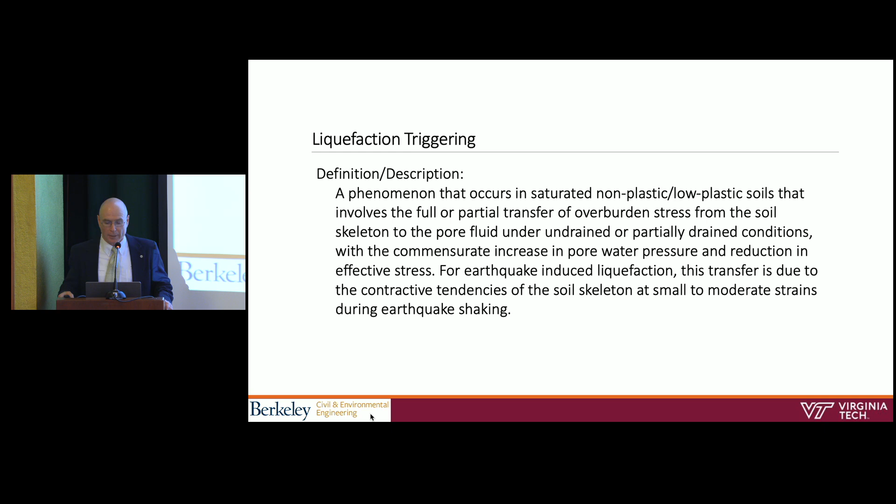The significance of this is really the fact that if you're decreasing effective stress, you're going to decrease strength. And with that, you could potentially have a bearing capacity failure, shown on the left, or you could have potential slope stability failure, or anything else where soil strength is important.

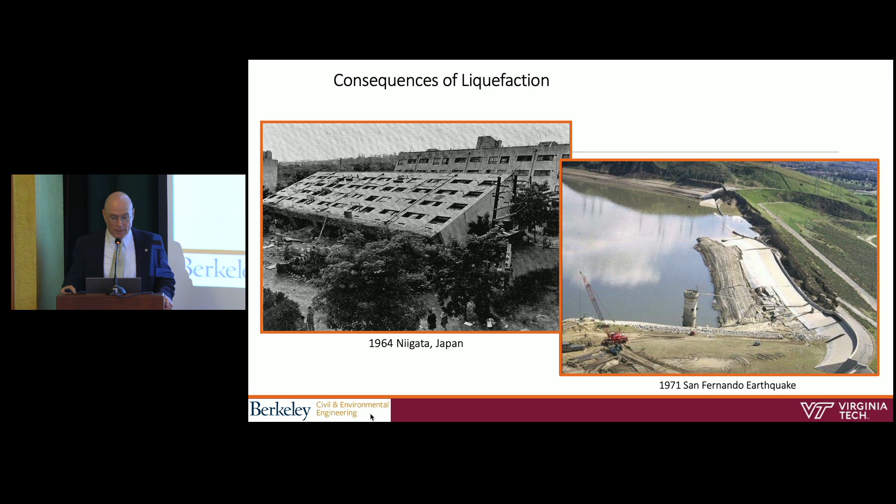Building on what Jorge said about Jim focusing on why - we're interested in knowing why liquefaction occurs, and then how to evaluate it, and then also how to remediate it. And again, this is the focus of the presentation.

Now, this isn't a timeline sequence of understanding liquefaction. I've put this together to help understand the question, why. This figure is from Professor Youd's PhD work, and what you're seeing on the horizontal axis is shear strain, and on the vertical axis volumetric change or change in void ratio.

So this is for an unsaturated or drained condition. These were strain-controlled tests, and what you're seeing is different numbers of cycles of loading - 1 cycle of loading here, 30 cycles of loading here, and 1,000 cycles of loading here. If you look, you'll see there are 3 different symbols, related to different confining stresses, running from 4.8, or essentially 5 kPa, up to about 200 kPa.

So the control parameter here was that the relative density was relatively constant, but it was showing that you're going to get the same volumetric strain when you induce a certain shear strain, independent of confining stress.

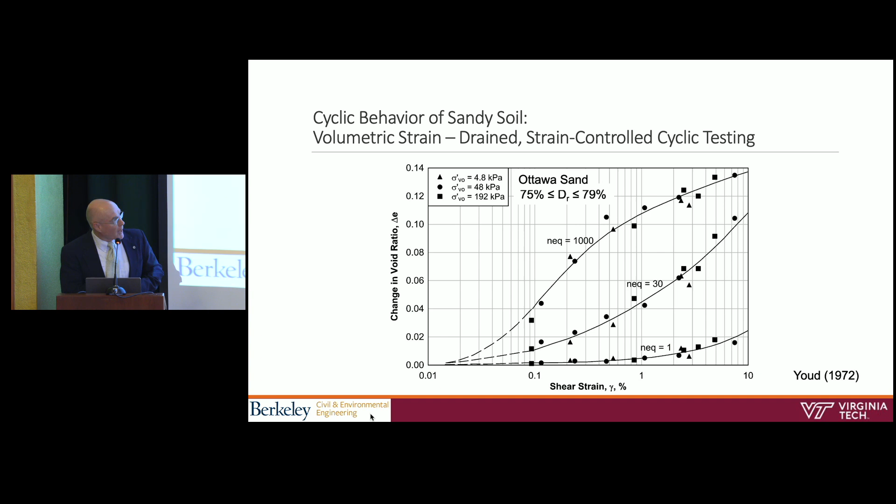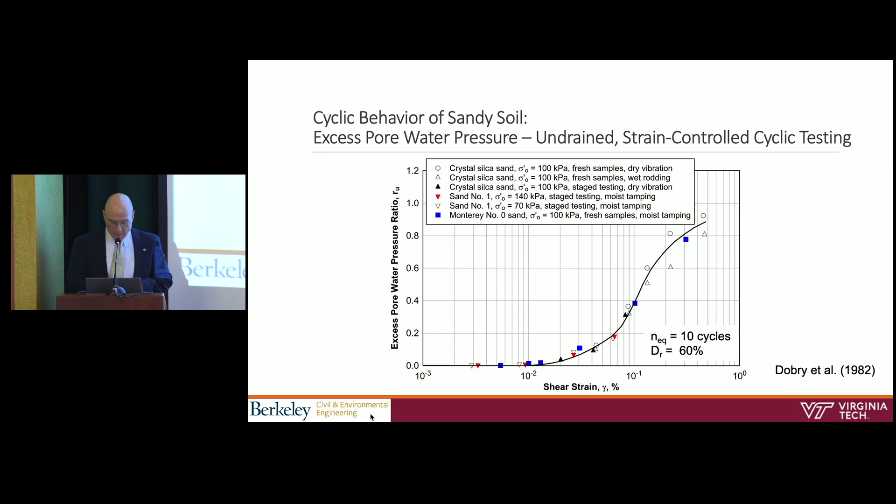If we now transfer this to undrained conditions where you have saturated soil, this is work from Professor Dobry. What you're seeing on this plot is shear strain on the horizontal axis and excess pore water pressure on the vertical axis. All these different types of data points fall into one nice line. These different symbols represent different types of soil and slightly different confining stresses, but when you put it in terms of strain, things normalize together. So it seems like a strain-based procedure would be the way to go. The reason is that for drained cases, we get the same volumetric strain, and for undrained cases, we get the same excess pore water pressure. Everything seems to normalize, both on soil type and confining stress.

However, inherently, the strain-based procedure has to be in an effective stress space. Remember that we're predicting accelerations, which relates to stress. In order to get to strain, we have to go from stress to strain. We need a constitutive model. We need to take into account the softening due to pore pressure generation. As a result, we really can't come up with a simplified strain-based procedure.

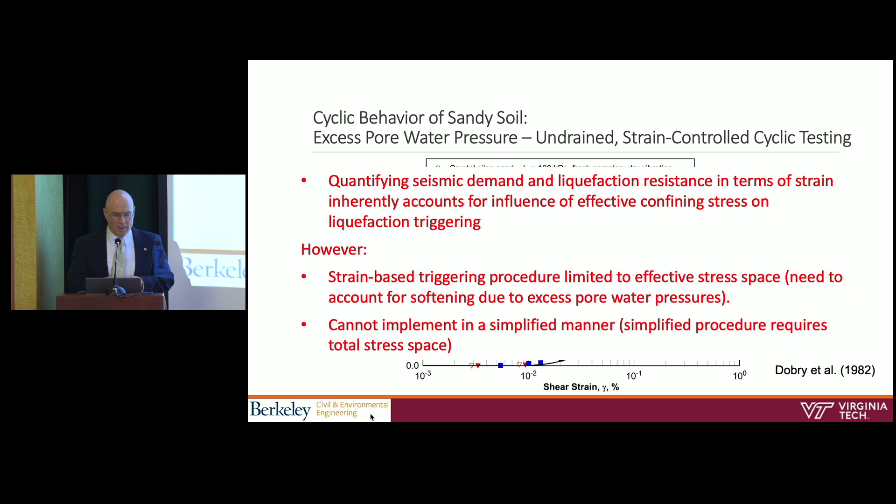So this didn't quite come out the way that I expected. That dot's a little bit bigger than it was supposed to be.

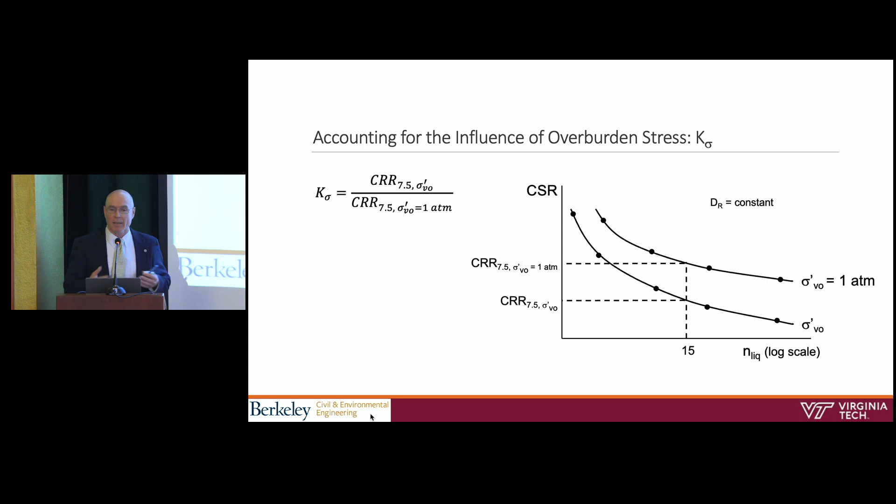This K sigma factor that I showed on the previous slide is simply the ratio of these two stresses corresponding to 15 cycles. That 15 cycles generally is considered the duration for a magnitude 7.5 event, which is our reference earthquake.

Compiling empirical data from a few different papers that I digitized, what we're seeing is K sigma factor on the vertical axis and vertical confining stress or mean confining stress, depending on whether it was cyclic triaxial or cyclic simple shear, on the horizontal axis. Most of these studies were performed in support of the design or evaluation of dams, and you're seeing a wide range of data, so there's considerable uncertainty and scatter. I'm highlighting the Duncan Dam data here, the green star, because I'm going to show those later, and also because that was a very detailed study.

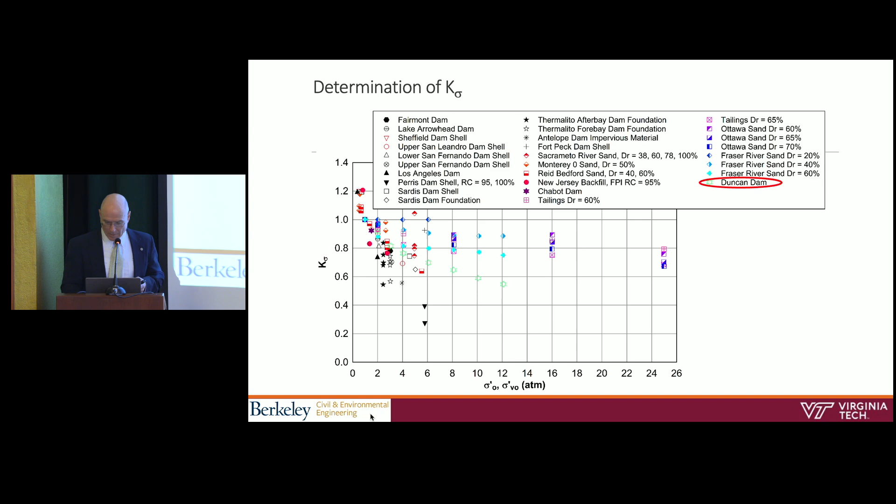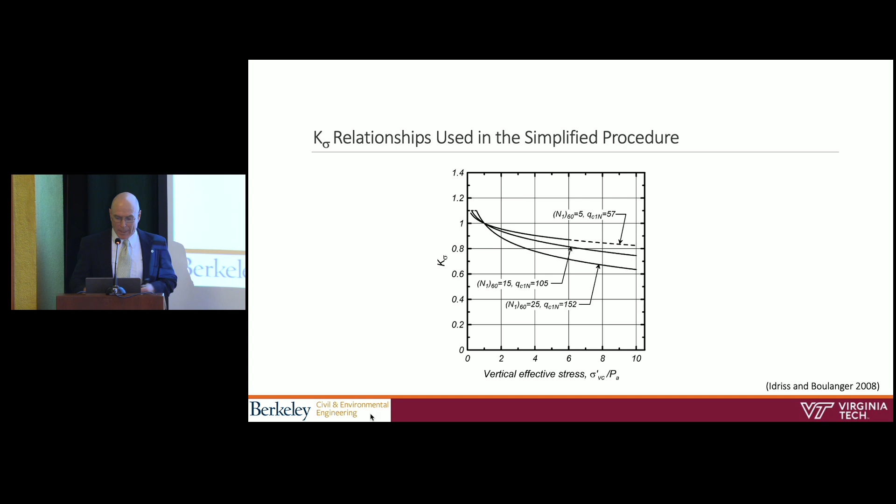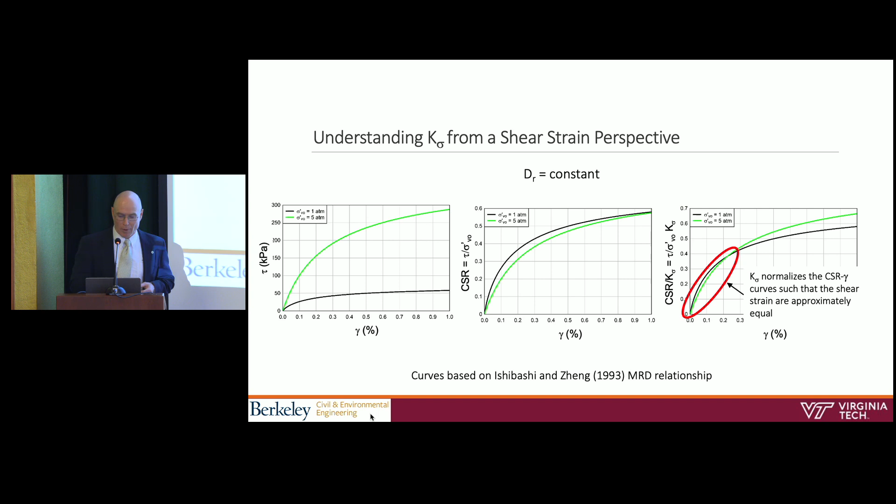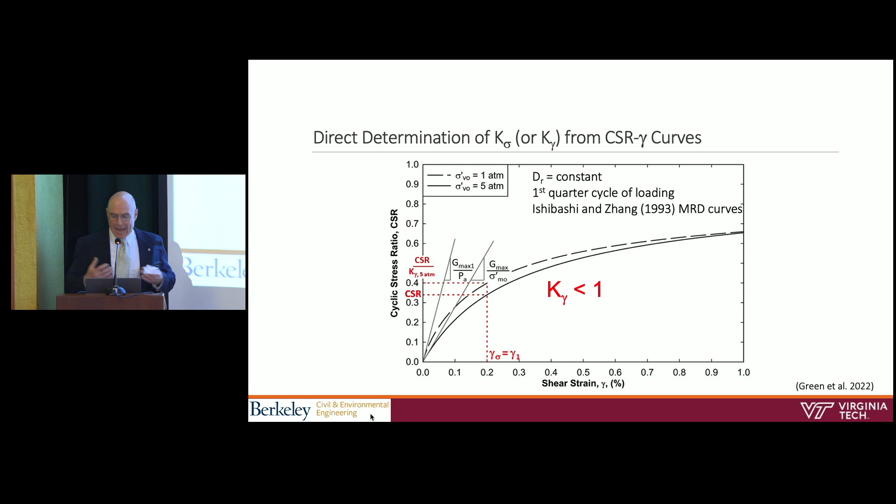So remember from the laboratory case, those curves that they were using were all at the initial liquefaction triggering, which means they only apply really for a factor of safety of 1, as opposed to factor of safety less than 1 or factor of safety greater than 1. And in this case, all of these are for a certain density, but I could plot other curves for different densities using the same approach.

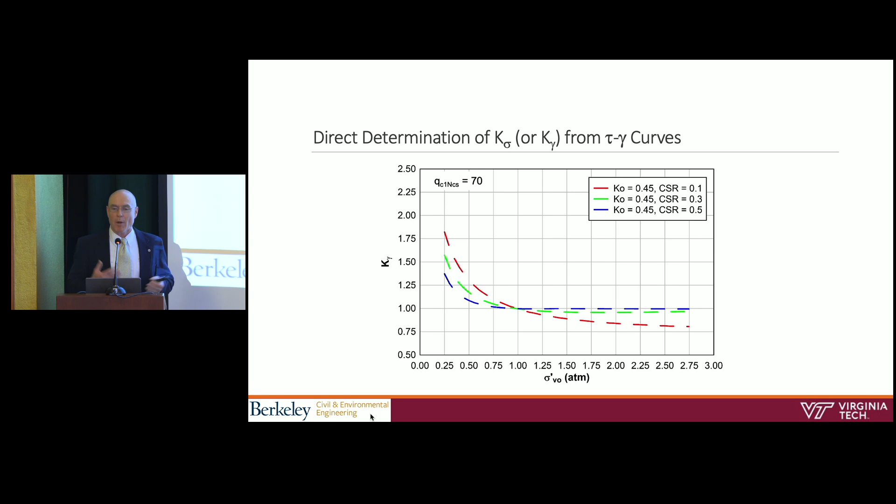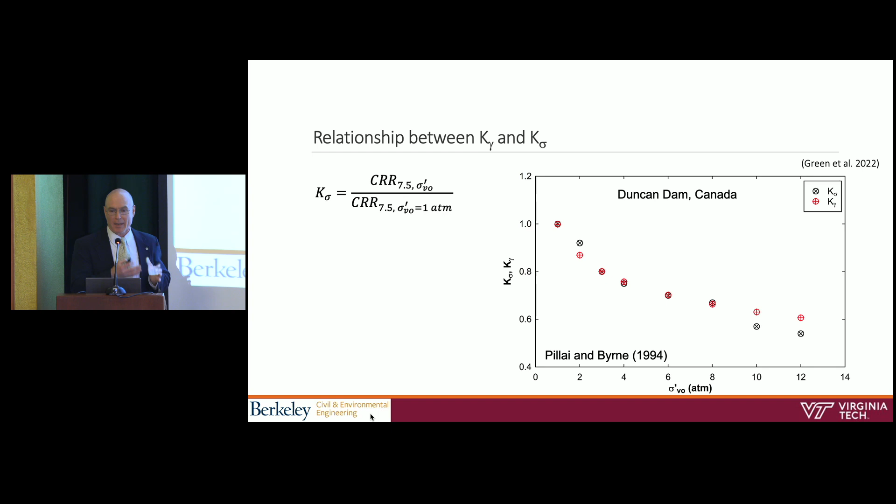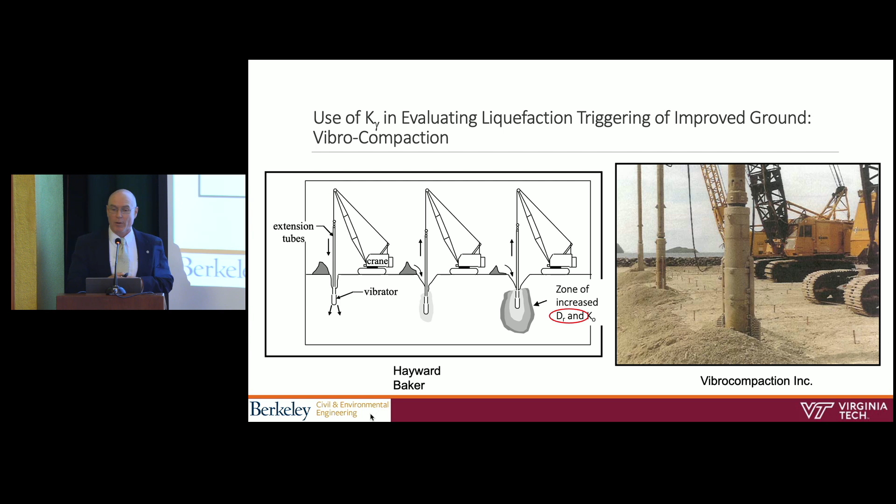So for vibrocompaction, just let me quickly summarize what you do for it. You're inserting a vibrating probe in the ground, typically assisted by water jets. You're getting it down to the depth of improvement that you want. You're letting it vibrate. As the soil densifies, you're now putting in more backfill. And then you repeat this process and you work your way out. So you end up with a column of soil that has increased relative density and also increased K0. And again, the slides got slightly skewed.

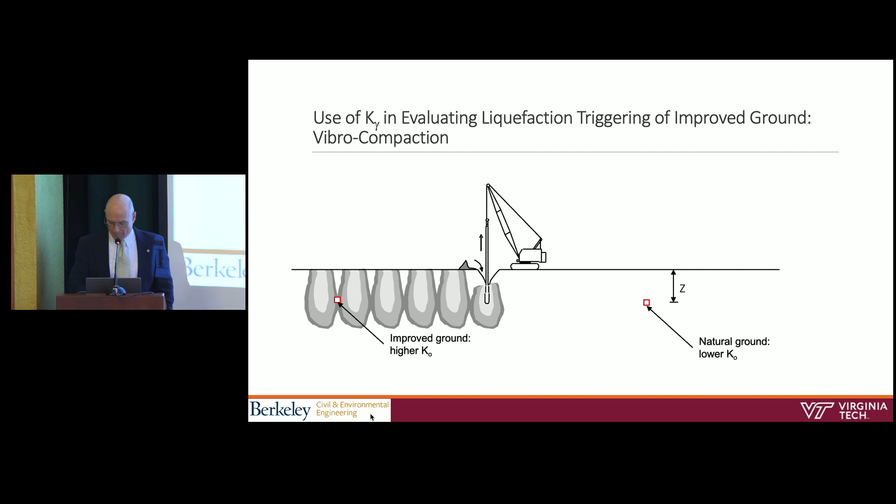And this increase, what I'm focusing on is for improved ground, but it also could be due to increased lateral stress due to aging. So you saw Professor Baxter present previously on the influence of aging, increasing K0. That will also have this same type of influence, maybe not to the extent of ground improvement.

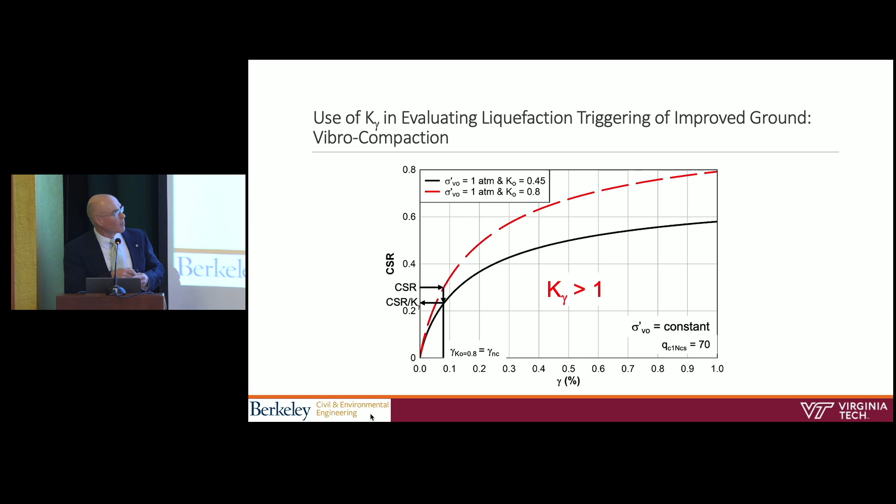And as far as the simplified procedure, we started out here, and as a result of the ground improvement or increase in lateral stress, we're moving down here. Both still are falling on the liquefied side, but the overall goal is to decrease this down into the non-liquefied side. So going back to my K-gamma factors, this is what I previously showed for normally consolidated soils.

Now I can plot it for just the increase in lateral confining stress. And my K-gamma factors now all plot above 1 up here. So what does that mean from a standpoint of liquefaction triggering? Again, it's going to reduce our cyclic stress ratio, which is going to increase our factor of safety.

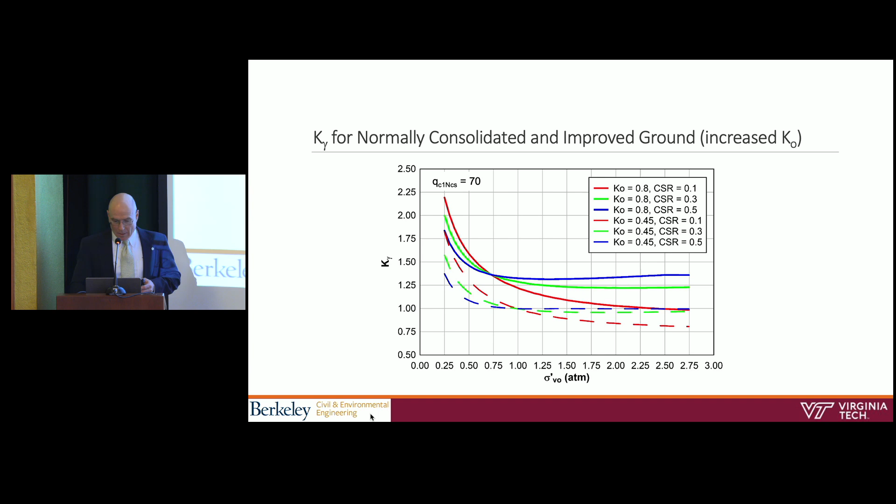However, Rodrigo showed the influence of lateral stress on cone penetration resistance. And this is work that Rodrigo did with Ross and also Jim. And this is a plot of K naught divided by K naught for normally consolidated soils. So in this case, the numerator is for our improved ground, the denominator is for our normally consolidated soils.

And then this factor CNH relates our penetration resistance for normally consolidated soils, which is our reference condition, to our penetration resistance for improved ground. And what you could end up seeing here is this factor is less than 1. That means that our normalized value will be less than our normalized penetration resistance.

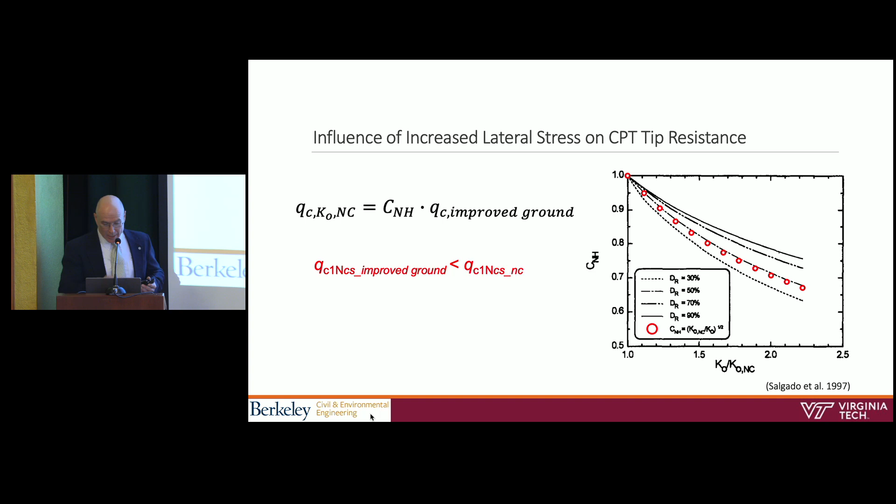So how does that influence our chart? Going back to this chart, we're starting out with penetration resistance here. We've already reduced our cyclic stress ratio as a result of the increase in lateral stress. However, now we need to also reduce our penetration resistance because of our increase in lateral stress.

So this actually has a counteractive effect on factor of safety, where our K-gamma factor reduced our cyclic stress ratio, which increased our factor of safety. The correction to penetration resistance actually reduces our CRR because we're moving from here initially over to here, and that's going to decrease our factor of safety.

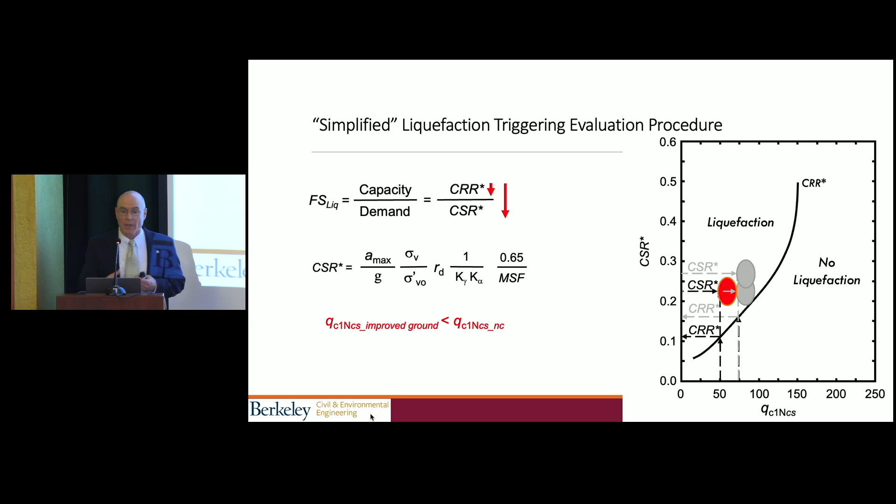So we actually have two competing effects. And in a perfect world, they would both perfectly cancel out, but they actually don't.

So doing a parametric study to see the overall influence of increased lateral confining stress, I'm showing plots here of factor of safety for improved ground divided by our factor of safety if we assume that ground was normally consolidated. So we ignored all the influence of lateral confining stress and just implemented the simplified procedure in the improved ground, ignoring again that we're not normalizing back to the reference state. And I did this for 3 different measured penetration resistances, 50, 100, and 150, so loose, medium dense, and dense.

And again, this is a function of cyclic stress ratio, and what you're seeing is your factor of safety increases as K naught increases. So I'm showing my reference condition is if my K naught was 0.45, and then I'm showing it up here for a case where my K naught increases to about a factor of 2. As a result, you can see that you're going to be conservative by about a factor of 2 if you're able to get those higher confining stresses.

That's if you have a loose or low penetration resistance. That effect is less as you increase in your penetration resistance and actually reverses. So in this case, ignoring the lateral stress is actually very over-conservative for a looser, lower penetration resistance, and is actually unconservative for a higher penetration resistance.

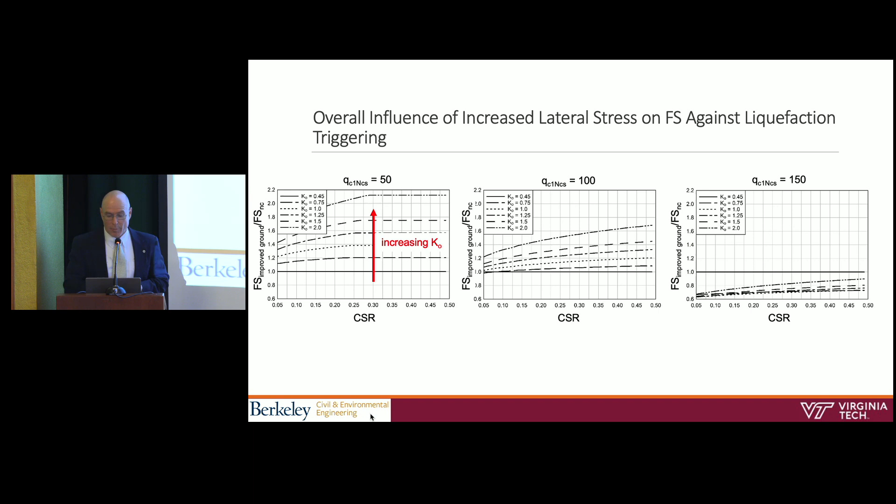So a summary, this study only focused on increase in lateral stress, and that's actually why I looked at vibrocompaction as opposed to stone columns. Stone columns will have the same effect, but then you're going to also have shear stress redistribution. I didn't even include density, changes in density. So this is just showing a factor that we normally ignore, which is lateral confining stress, and the results of ignoring it.

But using the simplified procedure and ignoring the influence on lateral stress, you're going to ignore the influence of lateral stress on liquefaction triggering, and also the influence on penetration resistance. The K-gamma factor mechanistically accounts for both the change in vertical stress, which is what K sigma did, but also looks at the influence of lateral stress.

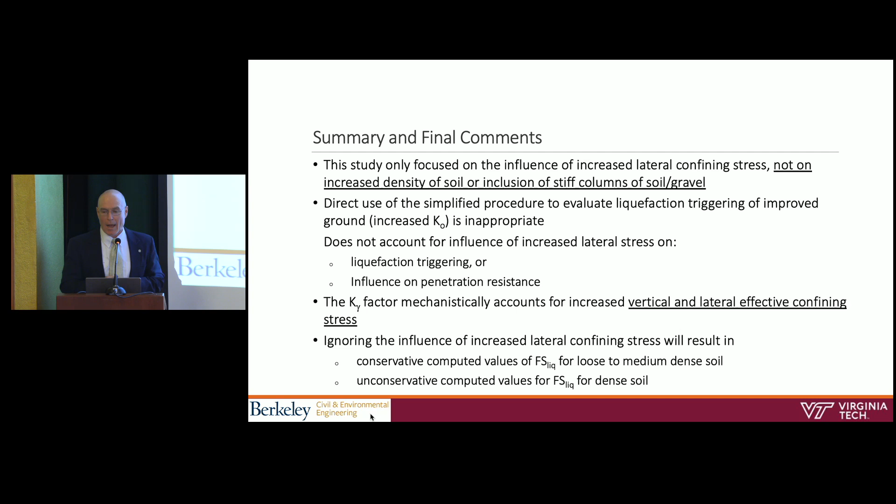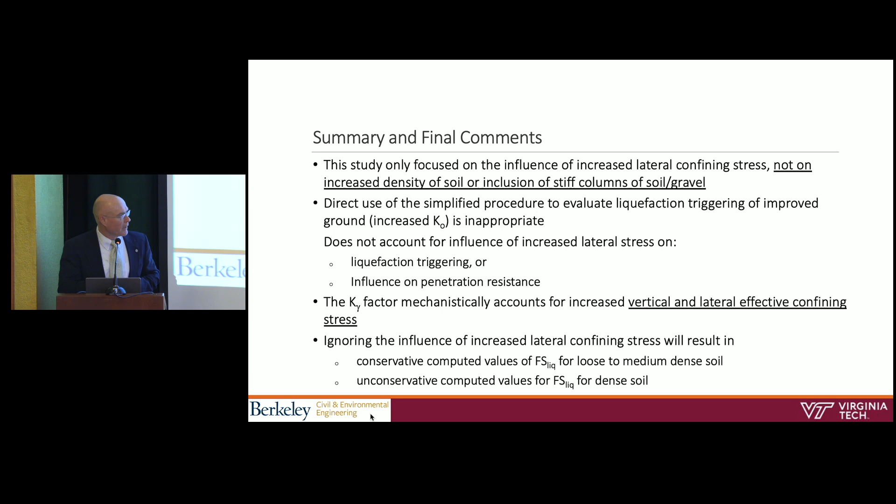Going back to what Jorge said, Jim focused on why - this understands the mechanics of why we're getting this behavior. And ignoring this influence is conservative if we have a loose to medium dense soil, and is unconservative if you have a denser soil.

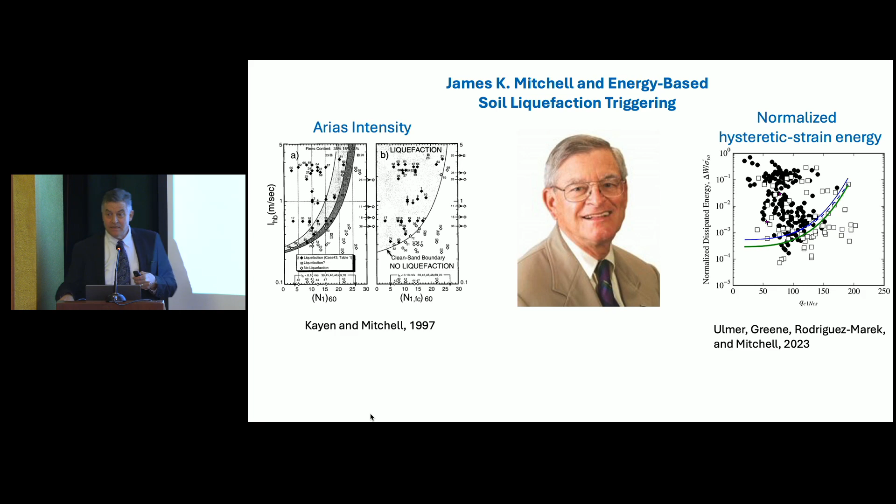And then 30 years later, Jim is 93, where he's the co-author of this paper. We're looking at dissipated energy, normalized dissipated energy, as a function of field measurements. Kind of fascinating, right? He gave us a lot of guidance in this work.

I want to talk about these two methods and talk about similarities, differences, and how potentially they can be linked together. On the left side we have Arias intensity - a really simple parameter. You get a strong motion record, you combine the energies of the east-west and north-south record.

It's basically the square of the accelerations over time. It includes duration - that's all part of it. Every one of these points is actually a field measurement. We estimated the Arias intensity at depth in the ground.

We knew what the N160 was because it was measured in the field, so it's totally an empiricist approach. Then we have a boundary, a clean sand boundary. It's easy, and that's how I got my dissertation done - I did it the easy way.

Other people are going to do it a much harder way later on. That parameter is easy to measure, reasonable to estimate, and it's a measure of the total load imparted on the soil by the earthquake motion. But it's not the ideal parameter, because we don't know what portion of that total load on the soil is doing work to soften the soil and elevate pore water pressures.

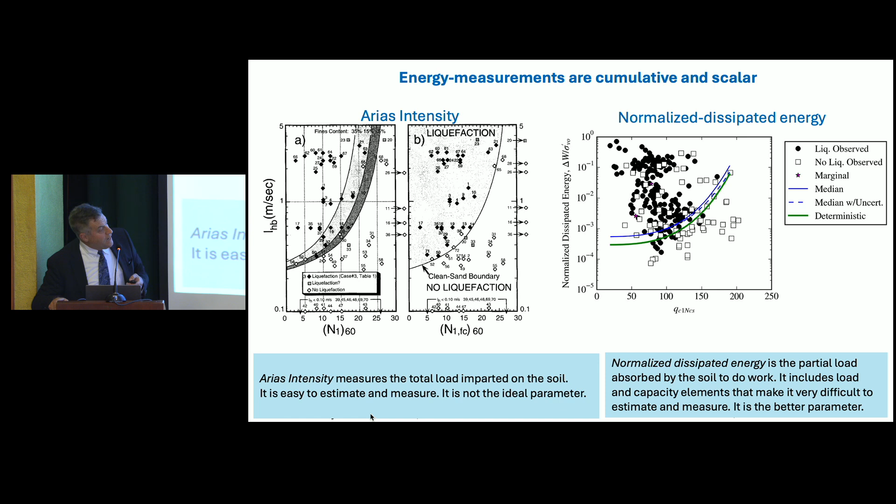It's vexingly hard to measure in the field. It's much easier, but still hard, to measure in the laboratory or in the centrifuge model. So it's the right model, but it's impractical to work with.

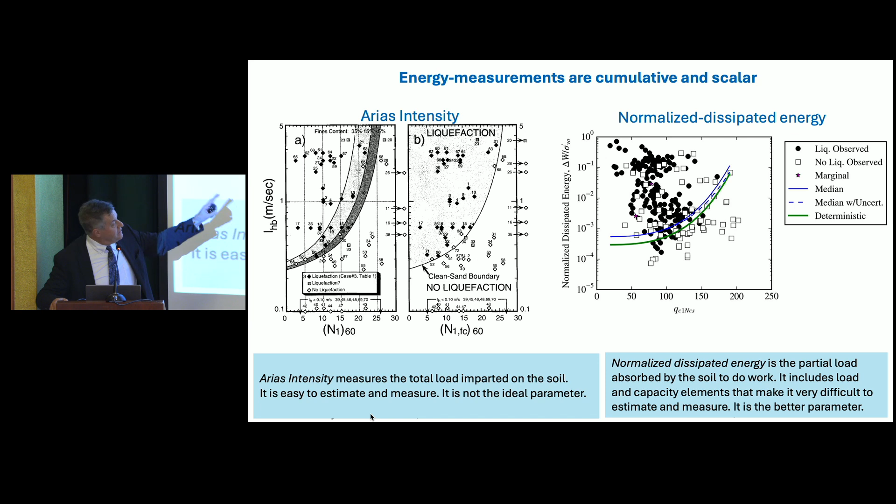Let me give you an example here. For our field data, we have almost no false positives in this data set. We have earthquakes from small to large earthquakes, and we're doing the A squared dt, so duration is factored into it. Great - the false positives over here are all over the place.

So what's going on? We have an outstanding group of authors on that paper, so it's no shortcoming of the authors. What's happening is that every single one of these points is derived from a proxy estimate of what that work would be, not from a direct measurement of the work. In other words, the authors were unable to calculate that dissipated work for every one of those field condition sites. So it's a difficult, vexing problem.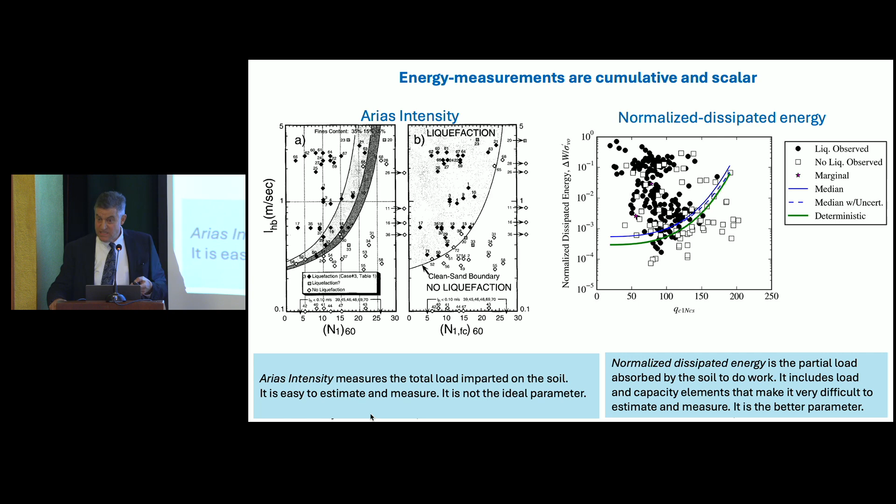So the outline of the talk today is to talk about energy-based methods, and in particular I want to talk about the ability to predict pore water pressure rise, understand the timing of initial liquefaction, and assess liquefaction potential. Obviously, across the boundary you're in the zone of potential liquefaction. I'm going to talk about three different methods: normalized dissipated energy, spectral energy ratio, and Arias intensity, and show you new work to try to understand and tie these ideas together.

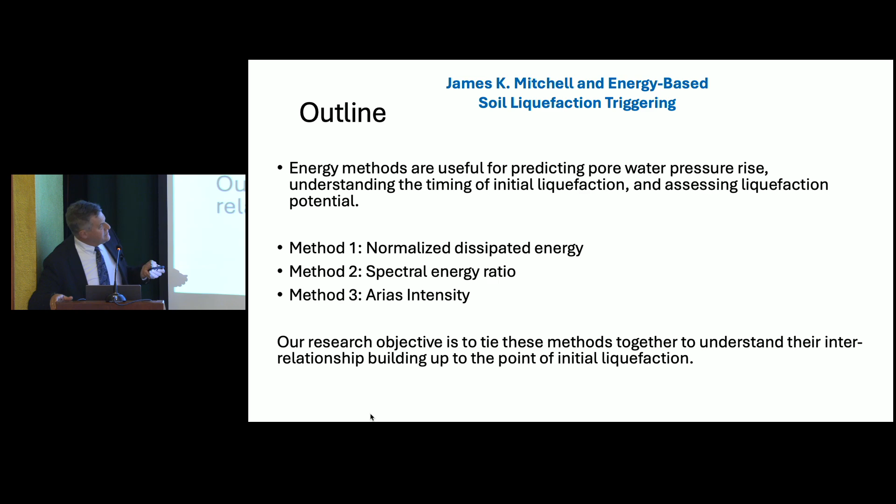This is a method from a recent paper where we try to calculate the dissipated energy. First we have ground motions, or in a laboratory setting sinusoidal waves, or in a centrifuge, loading from the centrifuge loader. We have our records from which we calculate stress-strain hysteresis loops, and we calculate the area inside the hysteresis loops, excluding areas outside using trapezoidal integration. Straightforward. Then we use the time histories of pore water pressure rise and relate it to the amount of work done.

We know what the RU is, building up from 0 to 1, and along the time we're accumulating the work, we're also monitoring the rise in pore water pressures. So we can get a relationship between the pore water pressure rise and the work done. We do that for the rise in pore water pressures, but we also have dilational spikes, which pull down that water pressure. For the dilational spikes, we look at the shear stress over confining stress and relate it to the amount of RU reduction for every dilational spike, to predict how much the pore water pressure falls. This is the kind of data you see here.

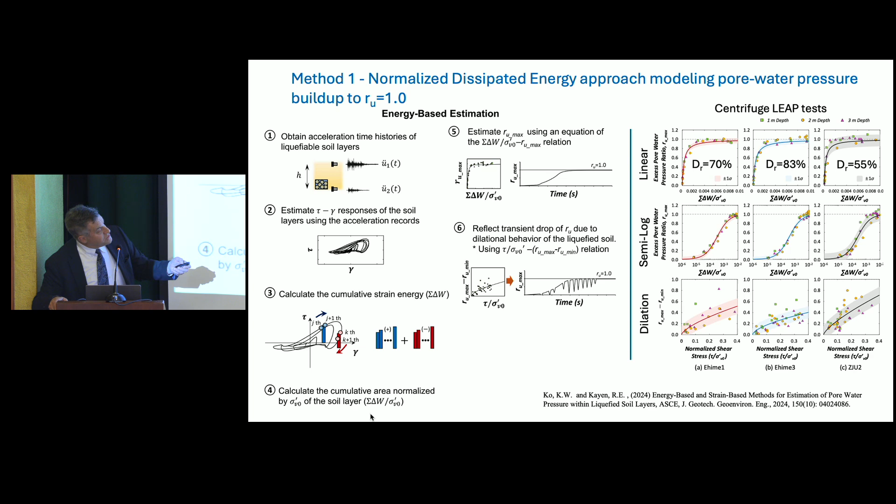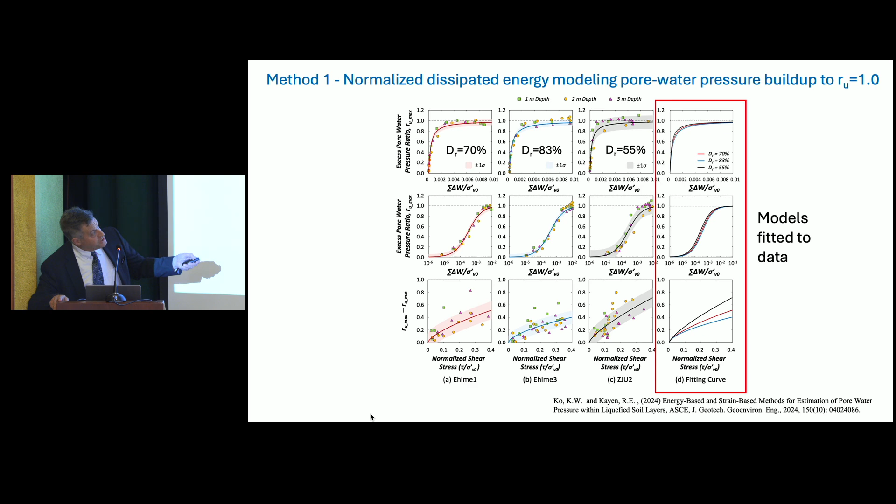If we look at these data across a variety of tests—three of seven different centrifuge model tests during the LEAP project—we can make modeled curves to relate the pore water pressure rise to the work done. We generated these data sets using the LEAP data, so if we throw it back at the LEAP centrifuge results, it ought to do a good job of matching the pore water pressure rise.

And it does. Here, the red line is showing you the rise in pore water pressure and the dilational spikes. This is in Japan, and in China, three different tests that were run on the LEAP project, and tests were run in Davis and RPI as well, and in England. We see a pretty good match.

There's another method here, a strain-based method I'm not going to talk about today, and it's not working quite as well as the energy-based method.

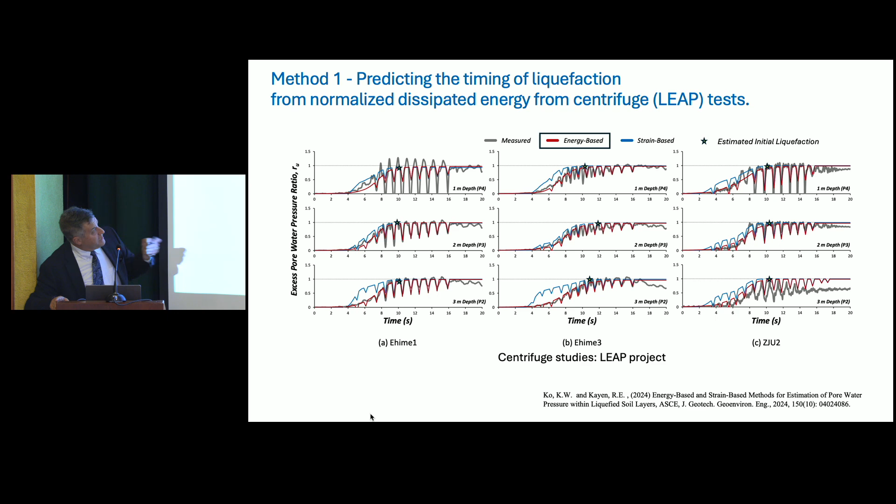So here's a case where we have basically a laboratory condition, a centrifuge test, and pore water pressures are calculated, and the work done by integrating the space in the hysteresis—it's all very tractable.

Once we start to take this out on the road, things become really difficult. One of the reasons is the hysteresis loops of real earthquake motions are so unusual and complex and odd, you can go crazy trying to trapezoidally integrate them. They're very odd shapes.

So here's the upper layer, north-south, east-west, north-south, east-west for a lower layer. And what we see in the rise in pore water pressure is, at some value of an RU greater than 0.95, a timing of liquefaction, an estimate.

The way we did this type of analysis is we used our LEAP relationship curves, related it to the relative density of the soil at the site—this is a site in Hokkaido from the 2003 Tokachi-oki earthquake—and we have two measurements, close to 50 seconds, or 48 to 49 seconds, and then 55 seconds for the deeper layer.

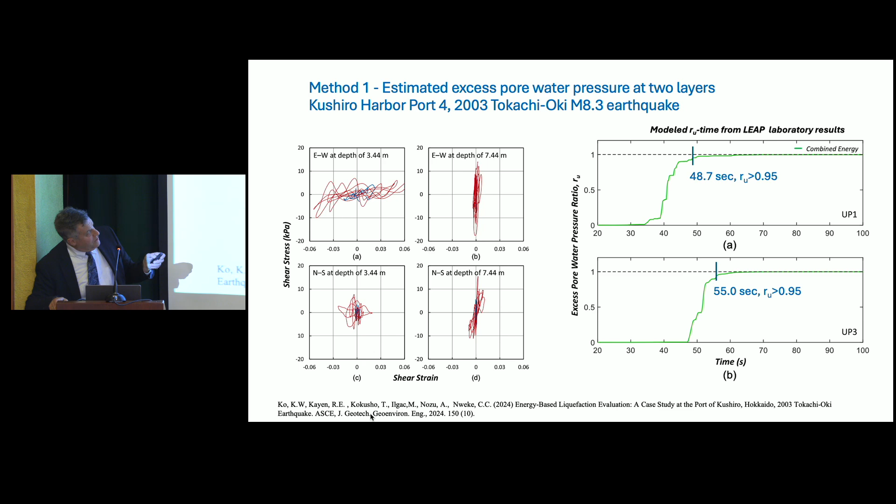We have the motions from the Kushiro port site, and when we apply the Stockwell transform method that Steve Kramer developed in 2016, we get very similar timings, 50 seconds and 55 seconds. More on the Stockwell transform in a moment, but these are two independent methods that are giving very similar timings in terms of liquefaction response in the ground.

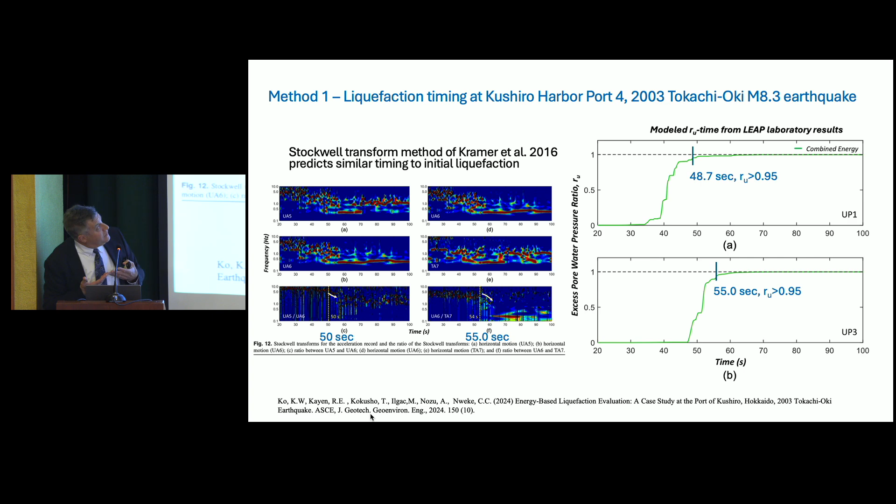The Stockwell transform—this is a great paper by Kramer et al., 2016—is this visual representation that displays the loss of higher frequencies as soil liquefies. The plot on the upper left is frequency on the y-axis from 0 to 10 hertz versus time.

The way a Stockwell transform is calculated is time slices are taken, and then the Fourier transform is calculated, and we basically plot it out in terms of its amplitude over time. The x-axis is the time. So we can see that the frequencies are relatively high before pore water pressures start to build up, and they start to fall very dramatically as the pore water pressure rises.

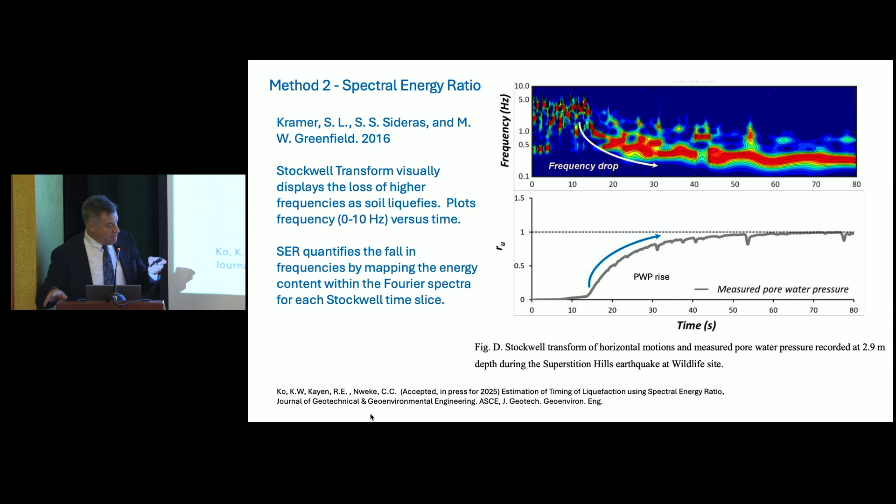What's going on here? We have basically energy working on the soil, raising the pore water pressure, softening the material, so that only lower frequencies can be transmitted through that soil mass. What is that? It's fundamentals of soil behavior. It's Jim's influence and Jim's ideas coming through in the analysis of a Stockwell transform, I think. And that's how it's presented here.

So this is a new idea in terms of how to quantify some information about the timing of liquefaction from the Stockwell transform, and it's called the spectral energy ratio. What we do is take the partial area of the Fourier transform, which might have peaks in the low frequencies and the high frequencies. The full range here is from 0 to 10 hertz, and we just fix some static spectral energy ratio, 0.5, 0.65, that would be nice.

It turns out 0.65 doesn't work very well—sorry, John, but I would have liked to have seen that work. In any event, what we're doing is picking the ratio of B divided by B plus A, and we're watching how the frequency shifts as pore water pressures rise, the soil softens, and that upper bound frequency shifts down to lower frequencies, and we track it. That's in contrast to the modal frequency method of Ozener et al., for example.

So, forward ho, let's look at what that looks like. So this is our frequencies over time. Here's our spectral energy ratio. Here's our frequencies from 0 to 10 hertz, and here's our time, progressive as the pore water pressures rise.

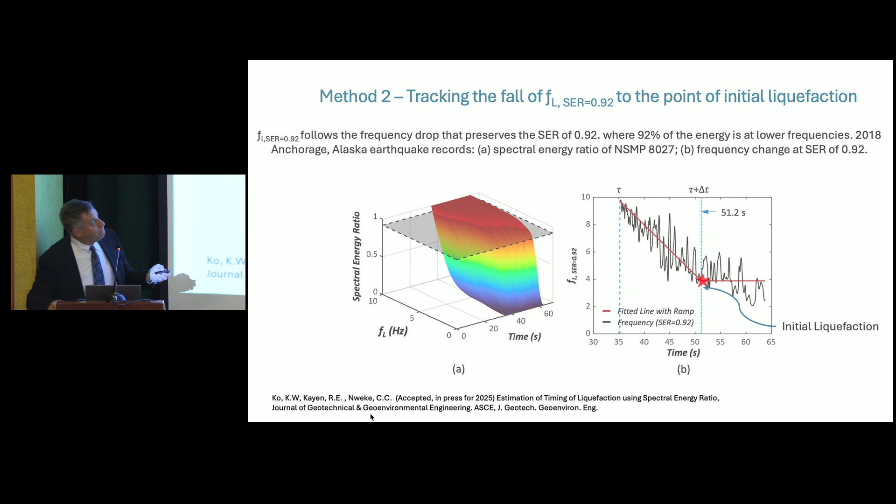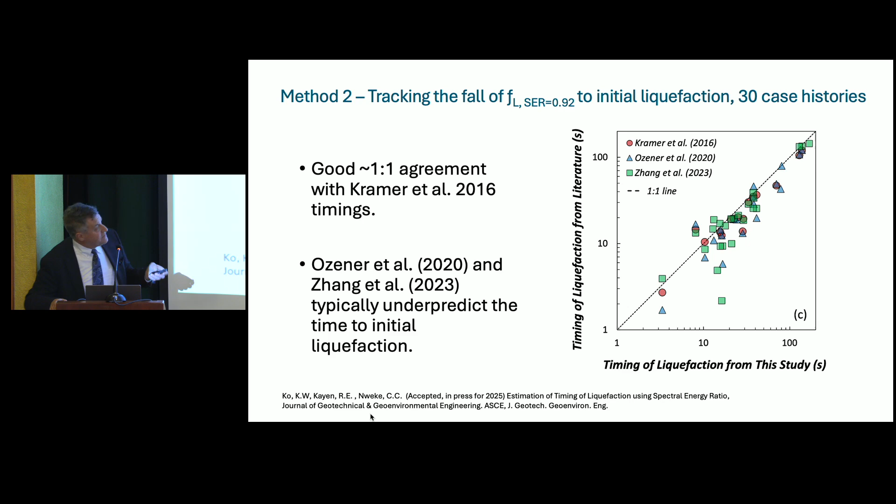So here's an example, there's about 30 case histories that we've looked at, and by and large, what we see is we get a very nice relationship with Steve Kramer's data set from 2016, and we have many sites where we have longer duration times than Ozener et al. and Zhang et al. We think that they're under-predicting the time to initial liquefaction.

Okay, the third method I want to talk about is Arias intensity. Arias intensity is a really simple parameter, but I want to tell you a powerful thing about that boundary curve that's different from the cyclic stress ratio boundary curve. Energy is scalar and it's cumulative, and that means as the soil comes up to and liquefies, reaches initial liquefaction, we have a certain value, and then it just keeps on rising. It can only go up.

And that tells us that the boundary curve in both the dissipated normalized work and also for Arias intensity, that boundary curve is the boundary of initial liquefaction. So let's take advantage of that.

So here's a data set. This is the Hokkaido data set, Tokachi-oki. When we use Steve Kramer's method, we get a certain timing, and it's something like 50 seconds. And as we track the rise in Arias intensity at depth in the layer, it crosses the boundary at a value very close to that, about 48.7 seconds, very close match.

And for another layer at Tokachi, a stiffer layer, we see a longer duration to the point of initial liquefaction, and the rise in Arias intensity at that point in time being associated with the crossing of the boundary, 55 seconds. So we have a comparison with the Stockwell transform, with normalized dissipated energy, and with Arias intensity, three different ways to extract information about the timing of initial liquefaction.

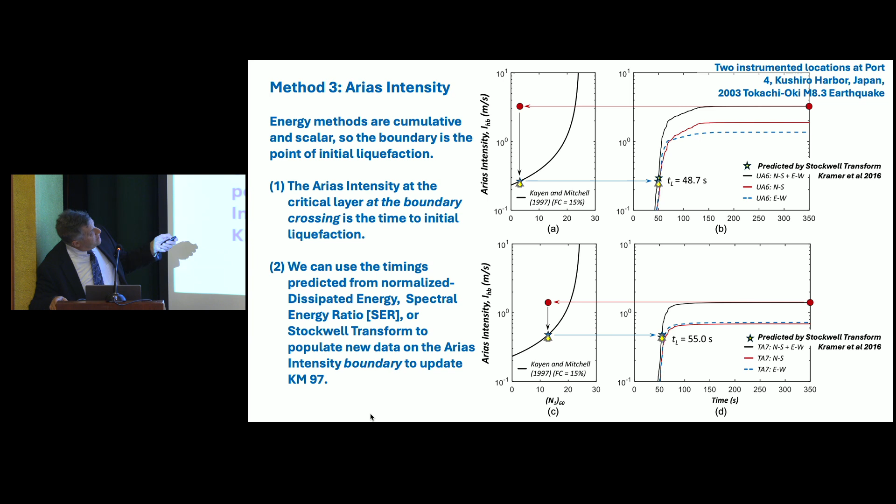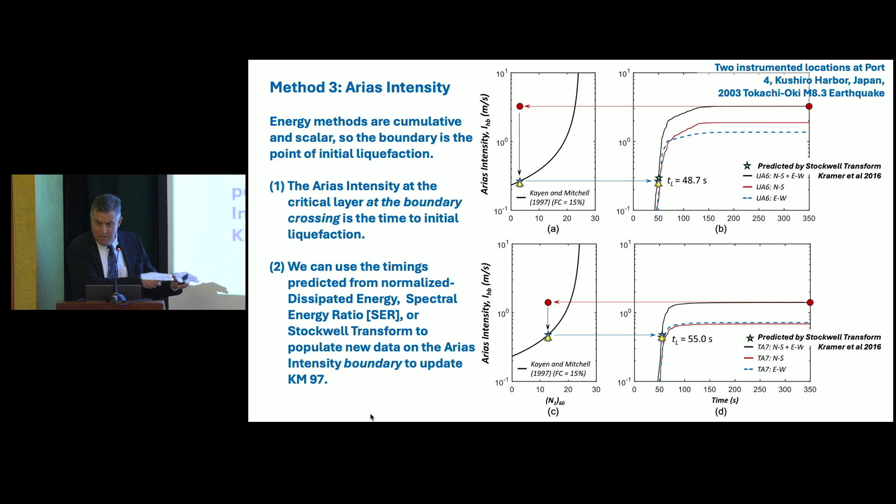Anyway, what does Jim Mitchell have to do with all of this? Well, one of the things that really impressed me about Jim when I first arrived at Berkeley, because I was coming from the U.S. Geological Survey, was, well, he was the most scientific person I could see in the department. He approached all his problems not as an engineer trying to solve a problem, which he did for sure, and we know that's hard to do, but science is harder. Science is harder than that. Science is understanding why something happens. And Jim took that extra step, and that was sort of a very unusual quality of Jim.